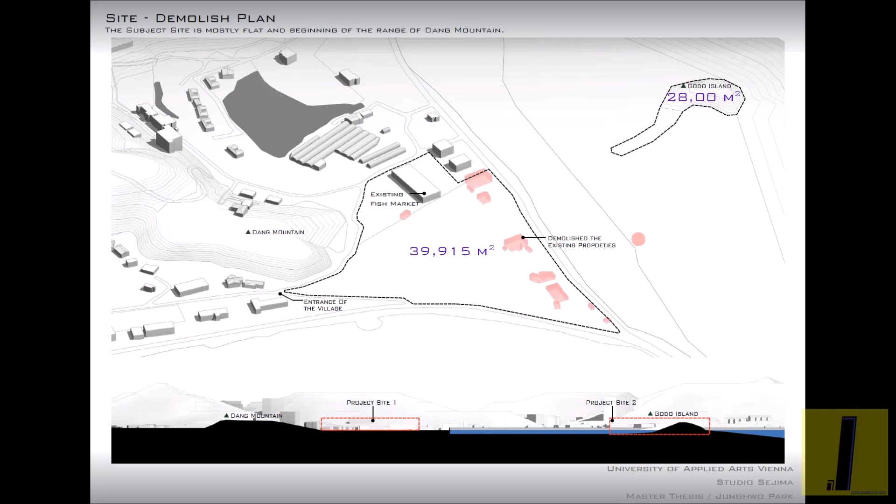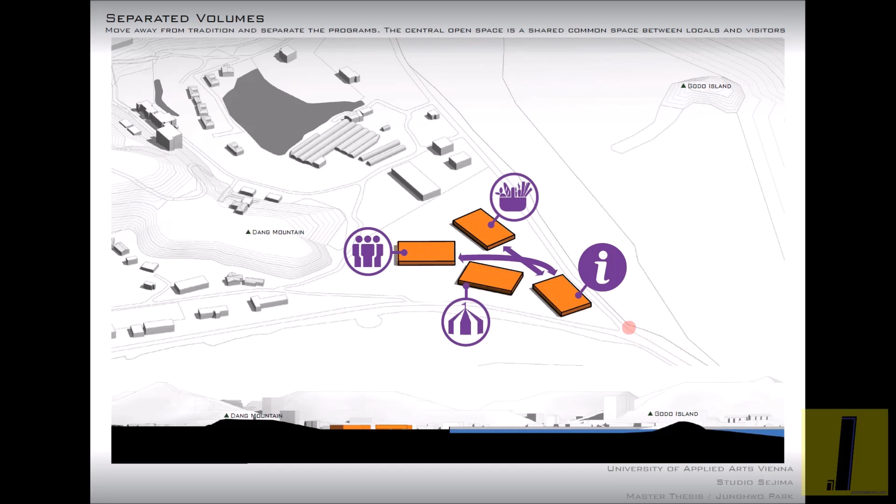They have open space in the center where they can freely communicate with each other. So the concept is the same: how traditional public buildings subdivide the public open space. I actually divide it into more functional building masses—there's a marketplace, a community center, and a visitor information center at the main entrance of the island, and there are also event places.

Then the volumes are separated again in order to create rich public pocket spaces. So in this case we have more open pocket surface spaces that provide different experiences of the space. Here it becomes a public park, and here could be the allotment, where community people can enjoy the weekend.

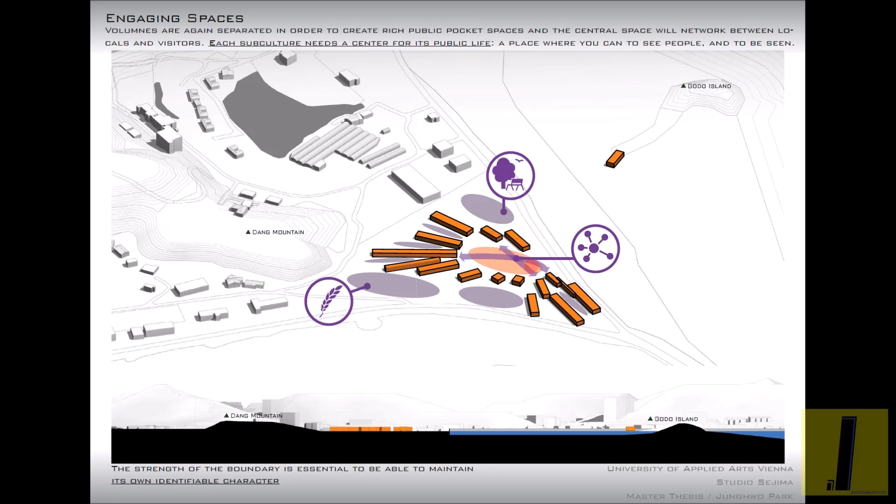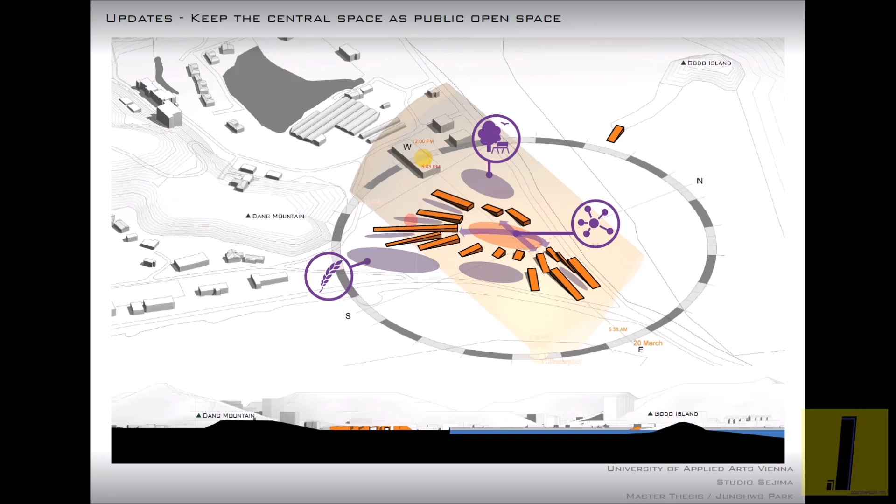And in the center, instead of having an elevated circulation, I decided to make it more open space. These spaces are of course affected by daylight, and this daylight over the year is very important to how I propose the landscape design of the final output.

And then I decided to have a higher position—it's kind of an observation tower where everyone could enjoy the view of the island.

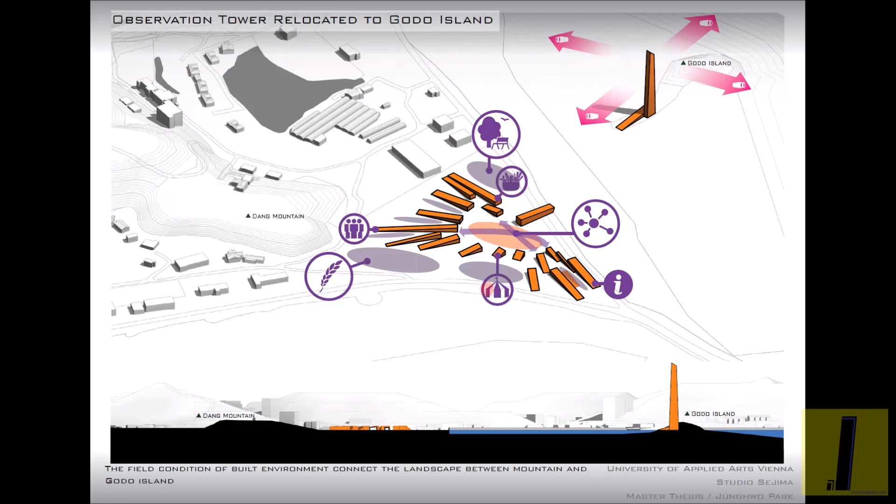So previously the central space where the navigation circulation was is now moved to Godo Island, where it could possibly connect to the main community center when the tide is low.

The reason why I'm proposing high places is because we have an instinct to climb up to high places where you can look down and survey the world—it seems to be a fundamental human instinct.

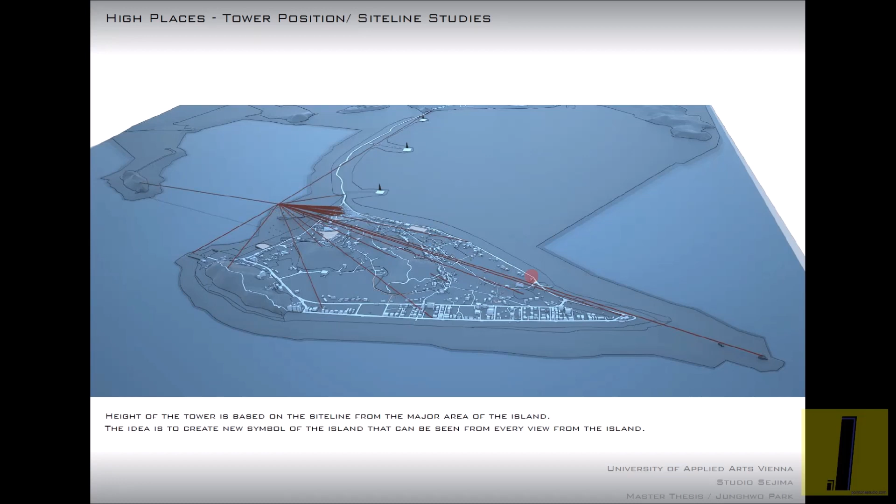So I'd like to propose this sort of observation tower, where from this viewpoint all the sightlines reach the major attractions of the island. The idea is to create a new symbol of the island by providing this observation tower, which should be reachable in view from every major attraction of the island.

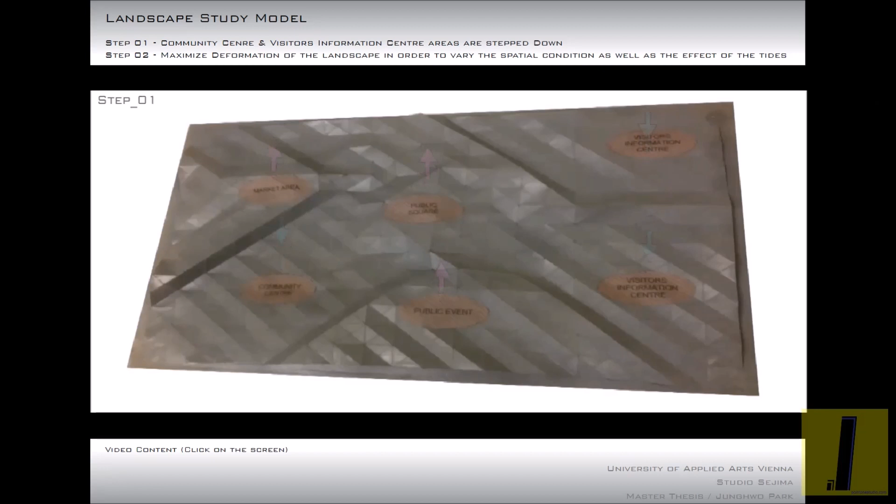And to come up with the landscape, I made a video. Let's see—so there is this space study where it's high tide, the water is coming in, and I manipulated it a bit more by providing more pocket public space.

When it's high tide, of course the circulation could change, and the whole function of the landscape changes because of the water level.

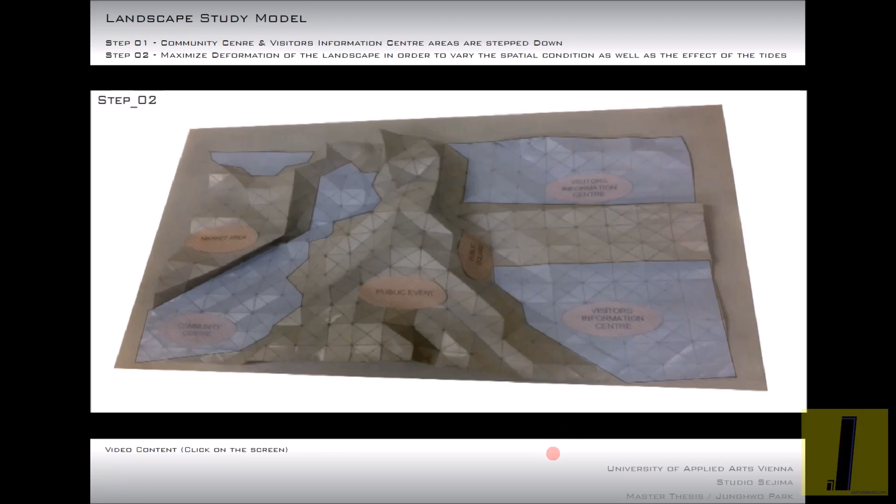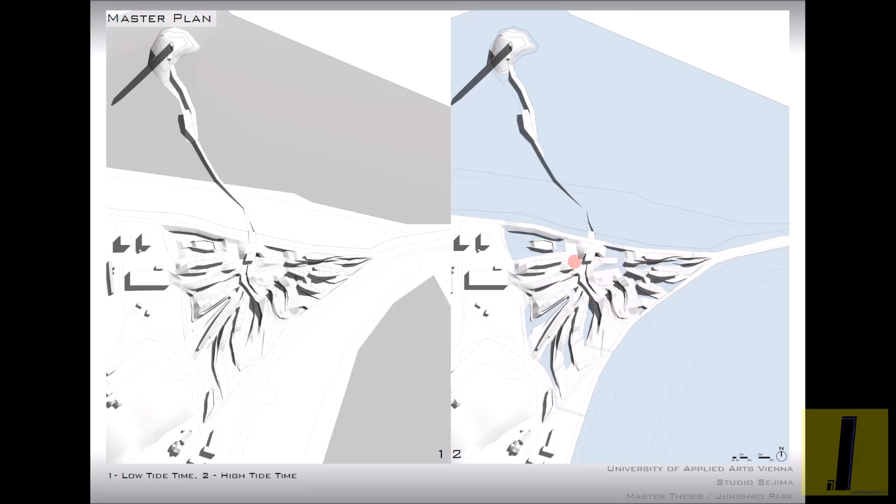As you can see from this master plan, when it's low tide, the public pocket surface is more exposed, and when it's high tide it creates a different circulation which navigates people's movement towards more indoor space of the building, as you can see.

And this water circulation sometimes flows from the outside and then goes inside of the building, so you can feel the effect of the tides throughout this whole complex.

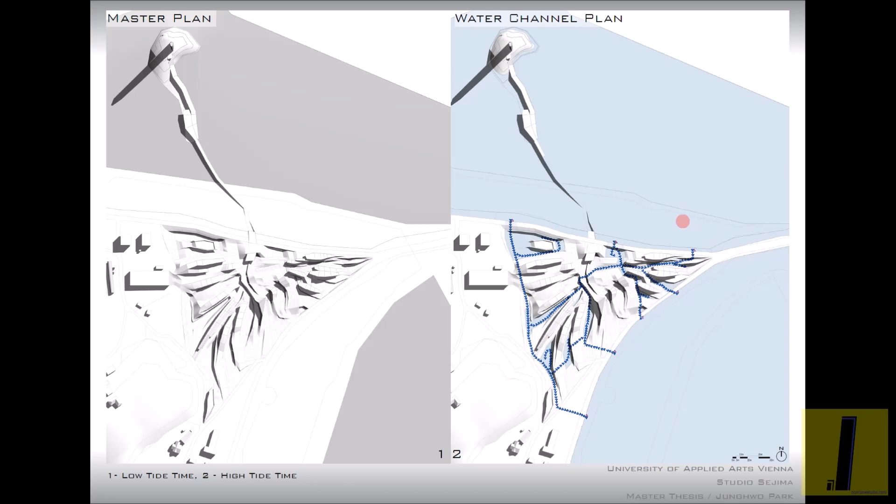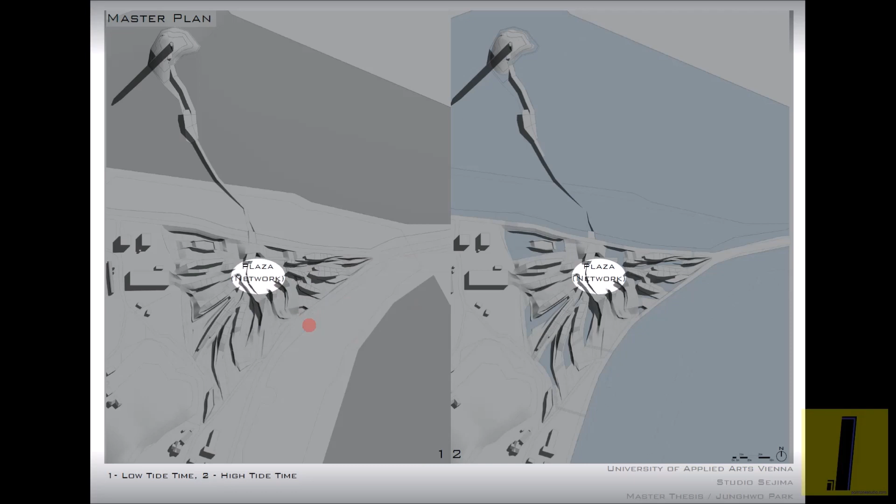So here is the community center, and that's the visitor information center, the event shop and marketplace, and then we have the observation tower. In the center, as I said, there is a plaza where it functions as a networking space between visitors and tourists.

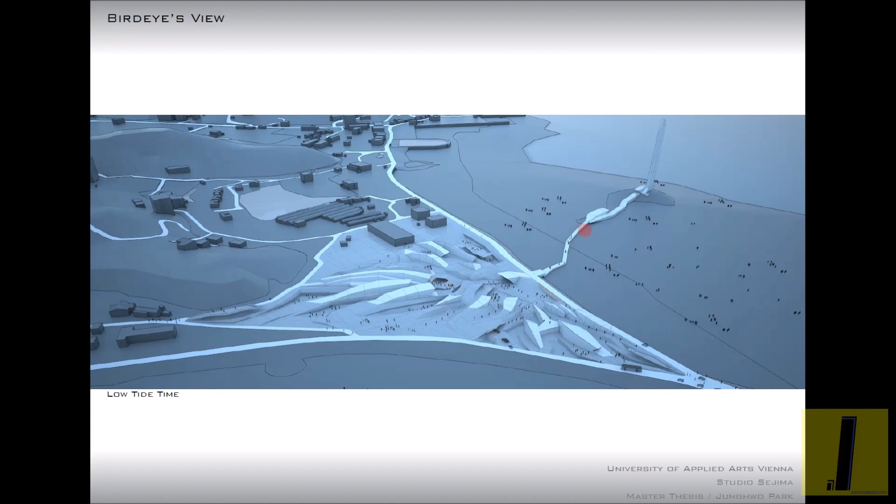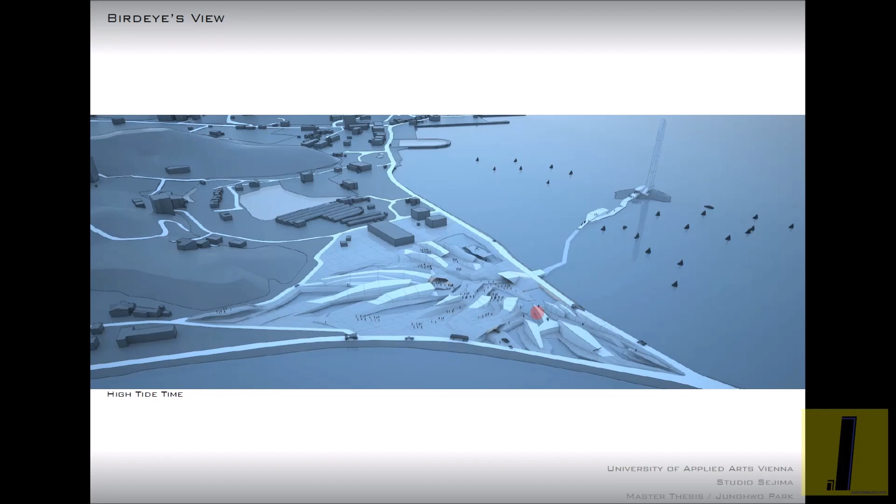So it's a bird's eye view when it's low tide. As you can see, the surface of the seaside is exposed, and people can walk around, and also have a similar experience of the pathway towards the inland, where visitors experience a similar pathway from this complex to the observation tower. And now it's high tide, and as you can see, the activity on the seaside is changed.

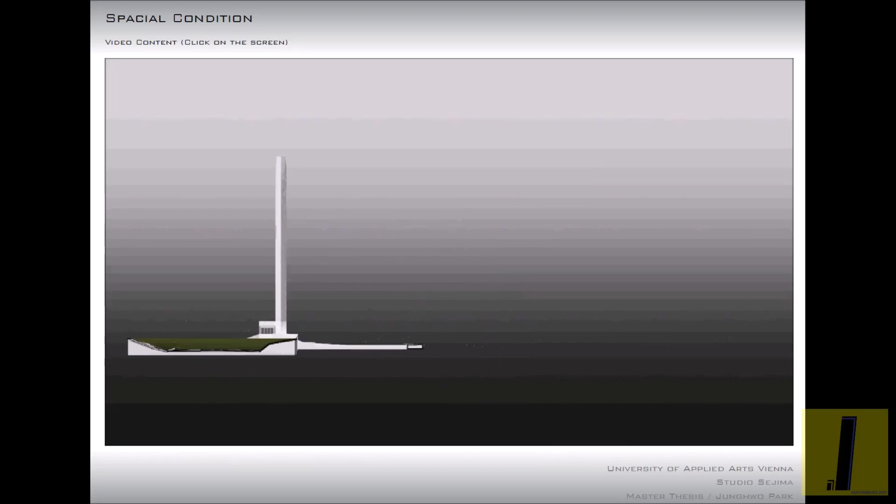Their public pocket space becomes kind of a swimming pool, where people now concentrate more on indoor space instead of outside, depending upon their needs. This is the cut through showing the whole complex, and the idea is that from each point of the landscape, the fluctuation of the spatial condition is rich, and at the end they could enjoy the whole view from the observation tower.

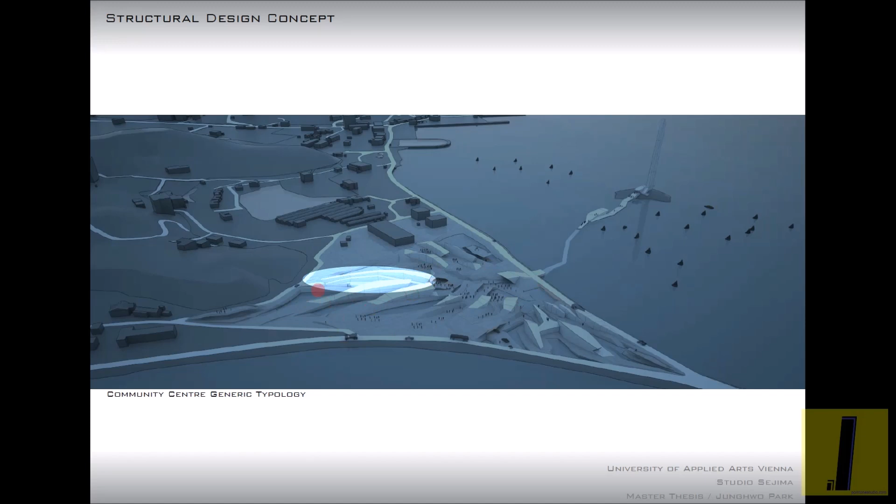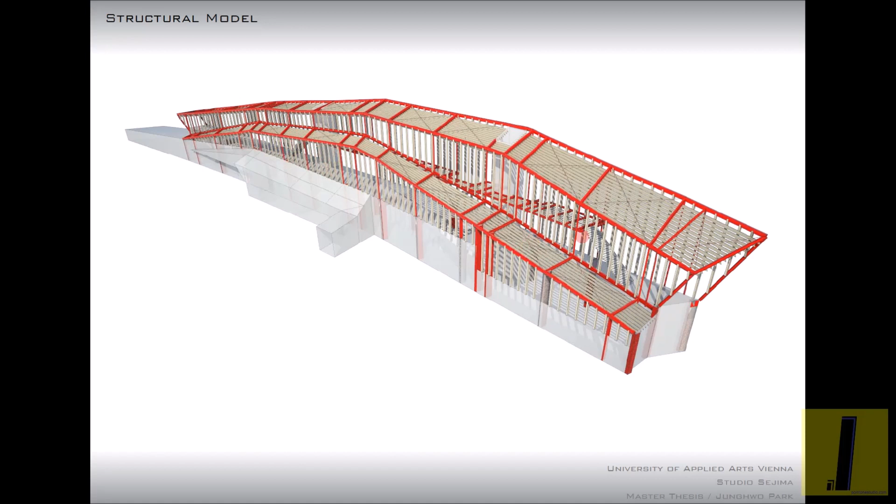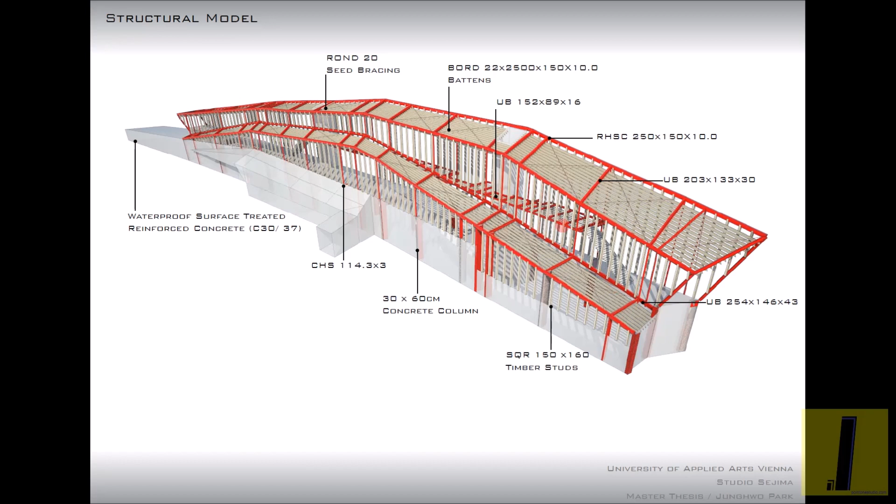So I'm going to explain the structural design concept of one of the typologies here, which is the community center and children's kindergarten, where the main basement is concrete structure, which is inevitable to avoid the water exposed area, and the whole above is lightweight steel and timber framing structure, where we can use local wood material, and also easy to construct and recycle for the whole life cycle of the building. The main structure is of course the steel framing based on the concrete basement.

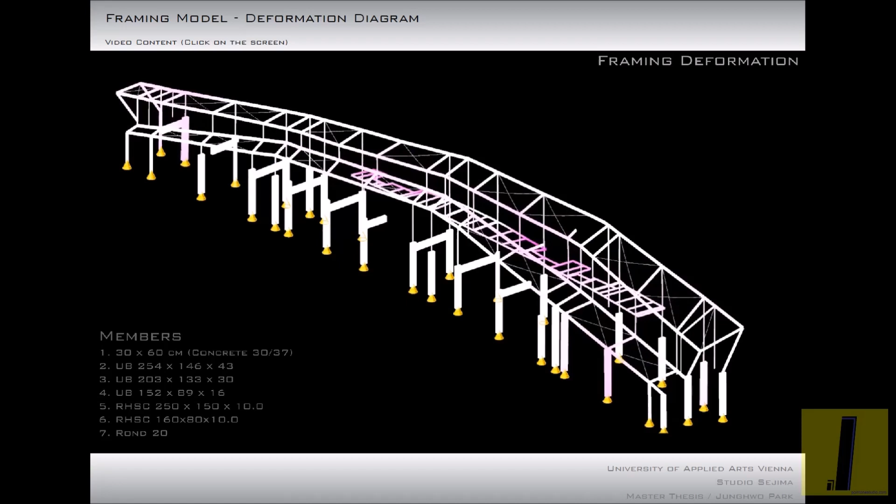Here we can see the deformation diagram with the structural proposal, and the big deformation you can detect from the platform here where the walkable space is, but the maximum displacement is 0.3 centimeters, so it's not so critical.

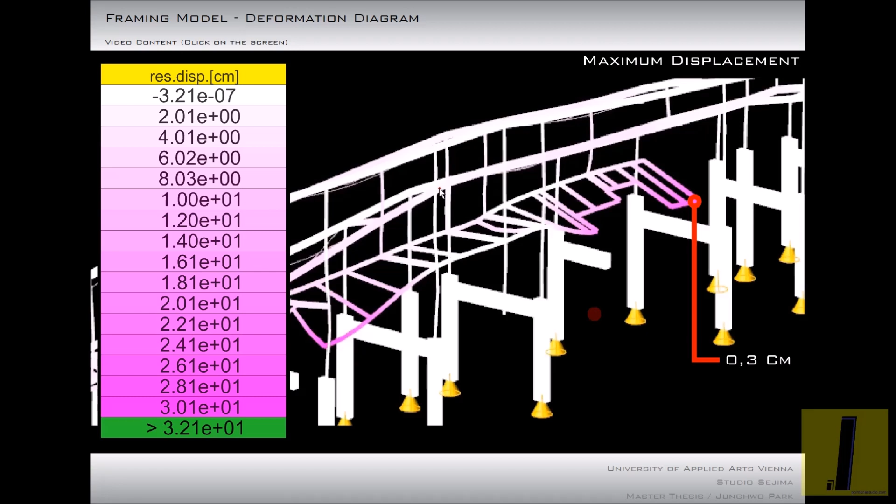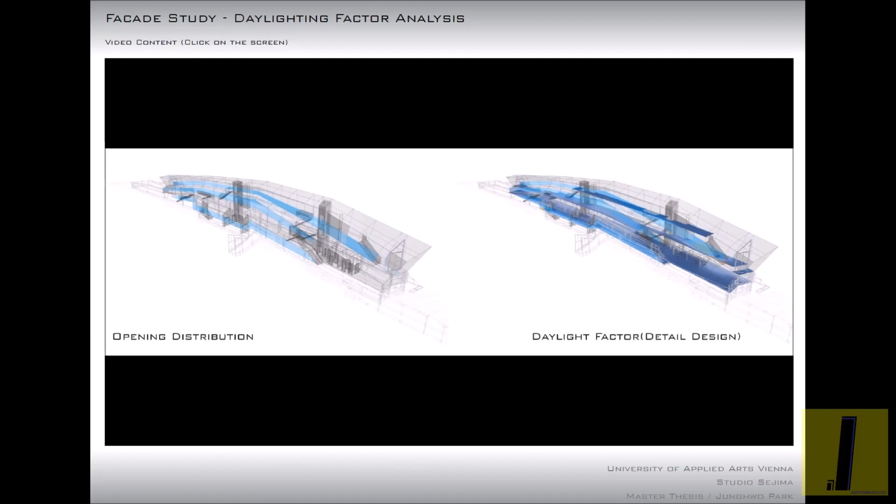I analyzed the daylighting so that I can panelate the facade opening space, and based on this analysis I could use this informed data to determine the opening space of the facade. So at the end, I decided to provide some skylights, and the blue area is the open space to bring in as much daylight as I can.

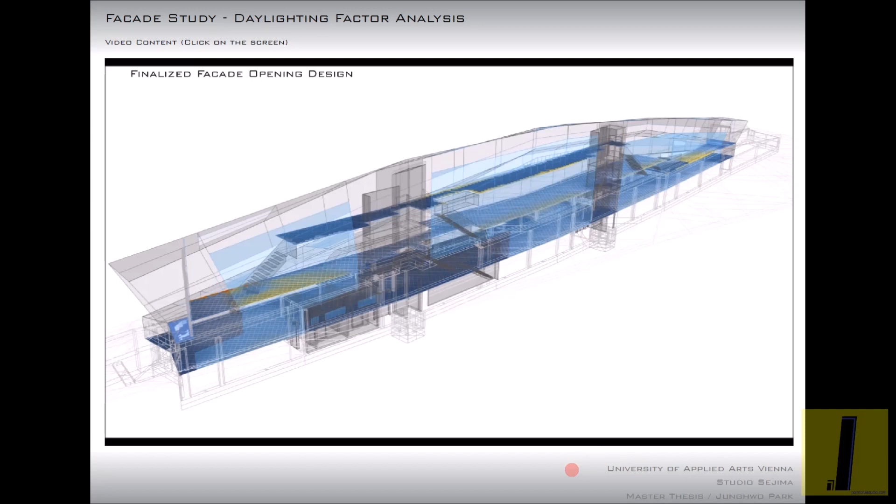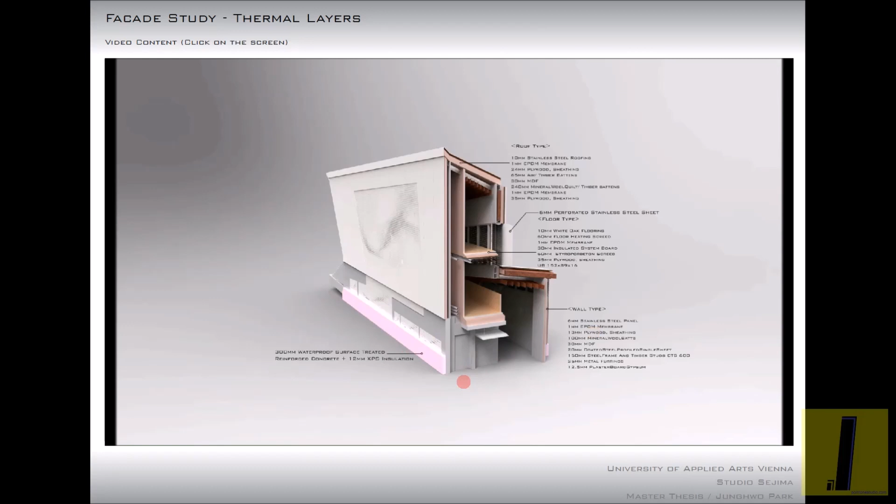And then the detailed model here, as you can see, the shading elements hiding the whole facade, and the major structures are timber structure, where the lower levels would be protected by special finishes.

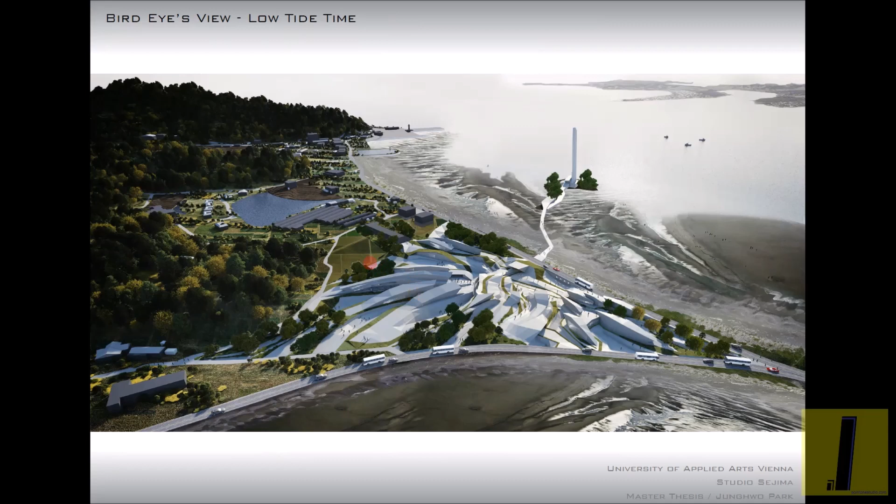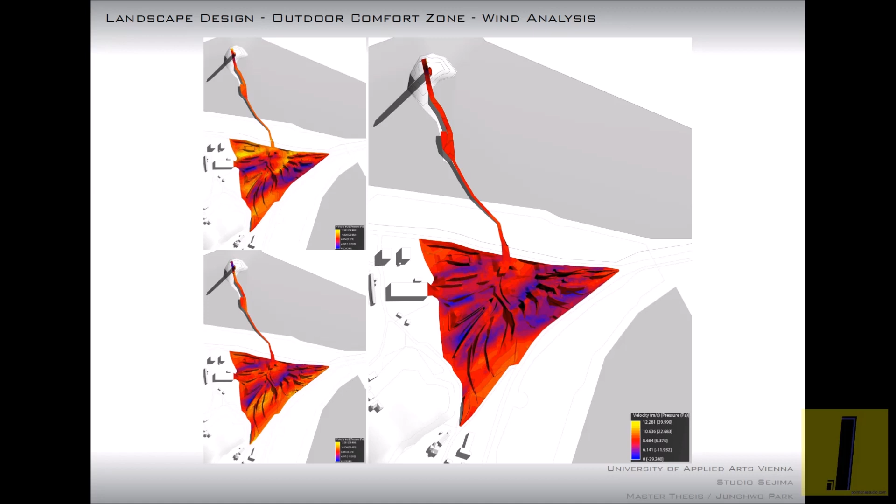So with this data, I could propose where to plant the height of the trees and vegetation. As you can see here, where we have higher wind pressure, I propose taller trees, and in comparison with the sun exposure area, I could plan different heights of vegetation for the landscaping design.